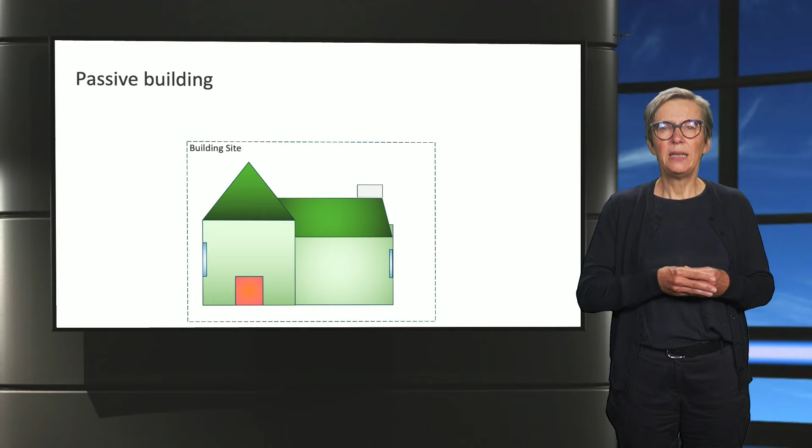Let's start with the concept of passive buildings. The main idea of this concept is that energy demand for cooling and heating is reduced as much as possible. In this way, the energy delivered to the site can be reduced significantly. To achieve this, a passive building needs to have a high level of insulation, high efficiency glazing, and a ventilation system that recovers the heat.

According to international standards for passive homes, this should result in a building with an annual final energy consumption for heating and cooling below 15 kilowatt-hours per square meter, and no fossil fuels being delivered to the site, and accordingly no on-site CO2 emissions from the chimney. In fact, such a house should be able to create a good indoor comfort with almost no heating or cooling system. The heat produced by appliances, lighting, and human activities is almost often enough.

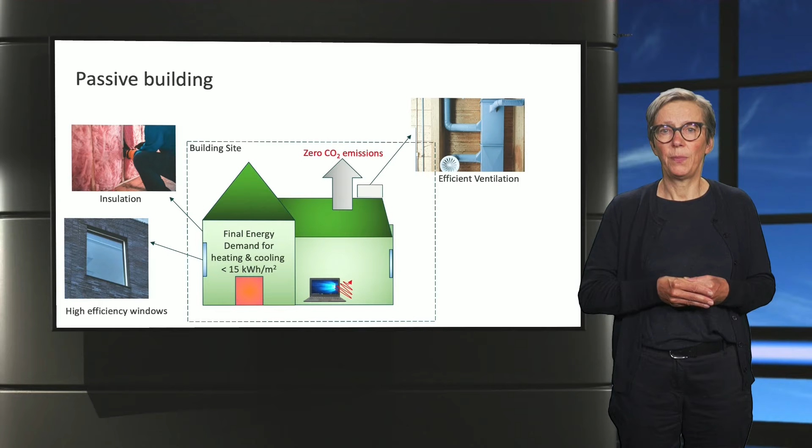From the cooling point of view, the house should be designed in such a way that no cooling system is needed. Using cold air at night or air cooled down in pipes in the ground should be enough to maintain comfortable temperatures. The second criterion is that the primary energy demand for heating, ventilation, and use of electrical equipment should stay below 60 kilowatt-hours per square meter, according again to the international standard.

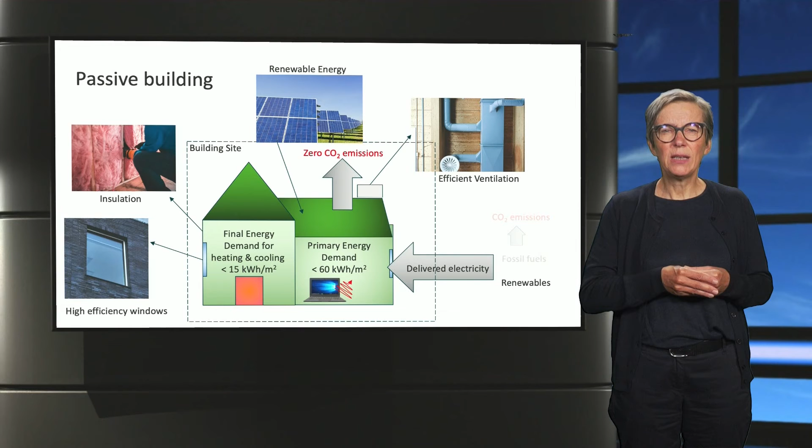To reach this number, the energy demand should be reduced as much as possible, and part of the delivered electricity should be from renewable sources or should be produced on-site with renewable sources. Please note that this still can result in off-site or Scope 2 CO2 emissions when delivered electricity is produced with fossil fuels.

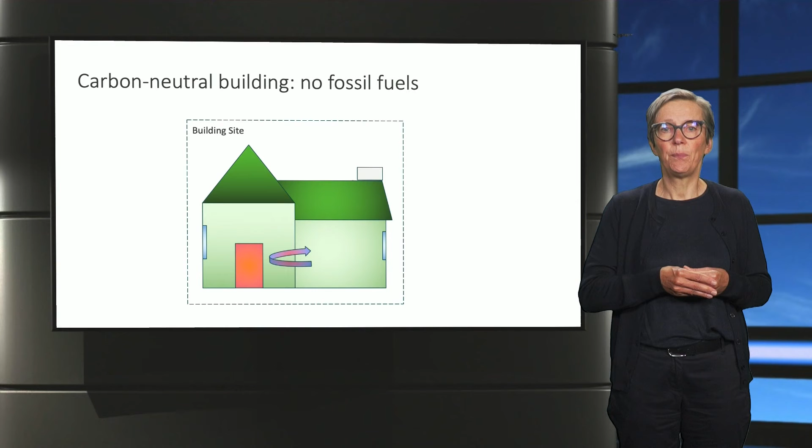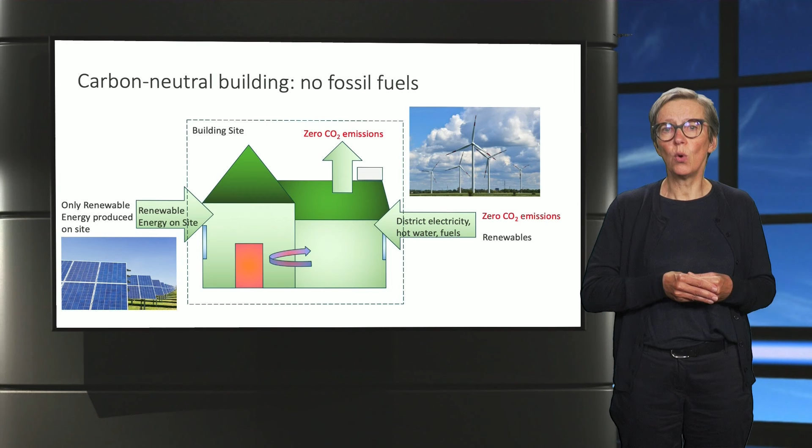The second concept we look into are carbon-neutral buildings. These are buildings that only use renewables. This implies no on-site or off-site CO2 emissions. These buildings are also sometimes referred to as zero-carbon buildings or net-zero carbon buildings.

A concept that goes even a step further is a circular building. In this case, not only the energy usage is considered, but a life cycle approach is applied. This means that production of materials, transportation, and processing at the end of the lifetime of the building is also considered. Examples of circular buildings on this slide can be fully disassembled, all materials are reusable, and/or old materials have been used in a new design.

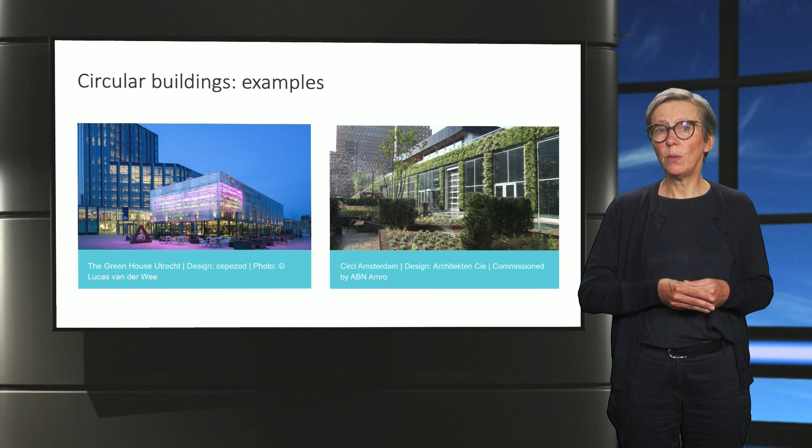With this video, we come to the end of this first week on decarbonization of buildings.